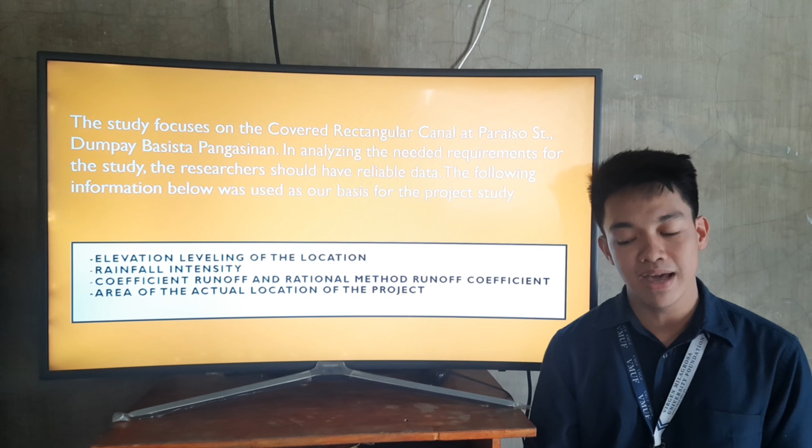The following information below was used as our basis for this project. The first one is the elevation leveling of the location. The second one is the rainfall intensity. The third one is the coefficient runoff and the rational method runoff coefficient. And the last is the area of the actual location of the project.

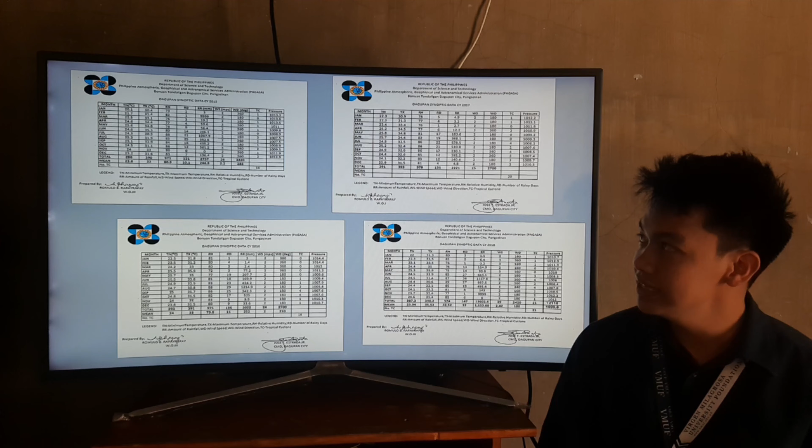So here's the data coming from Dagupan, PAGASA. As you can see, from 2015, 2016, 2017, 2018, and lastly 2019, this is the data that we collected and can use in our computation.

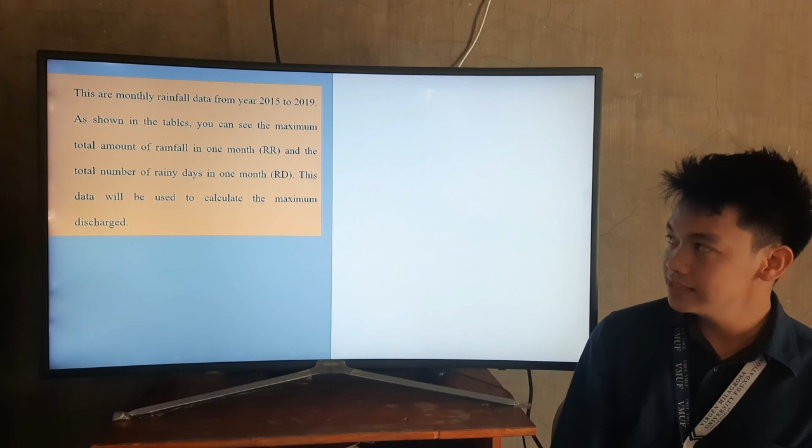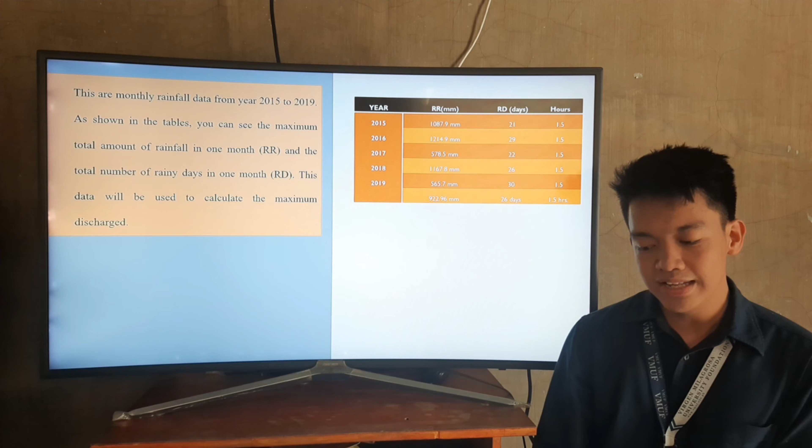These are monthly rainfall data from year 2015 to 2019. As shown in the tables, you can see the maximum total amount of rainfall in one month, RR, and the total number of rainy days in one month. This data will be used to calculate the maximum discharge.

So to get the rainfall intensity, we have the rainfall in one month over rainy days in one month times hours. So it is equal to 922.96 millimeter over 26 days times 1.5 hours, which is equal to 23.67. So let's say this is 30 millimeter per hour.

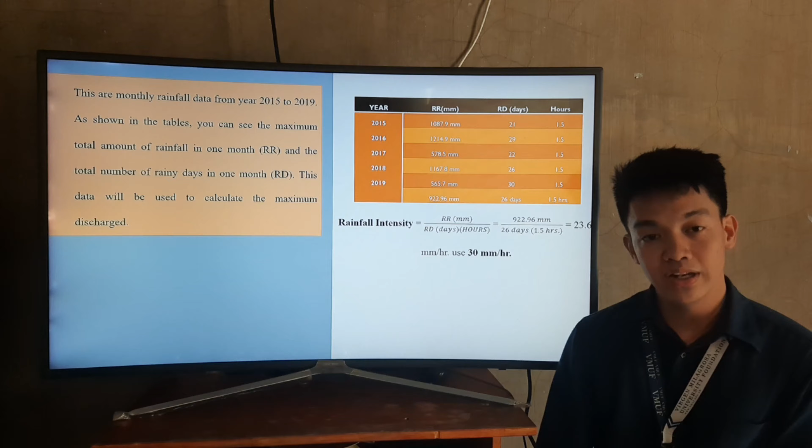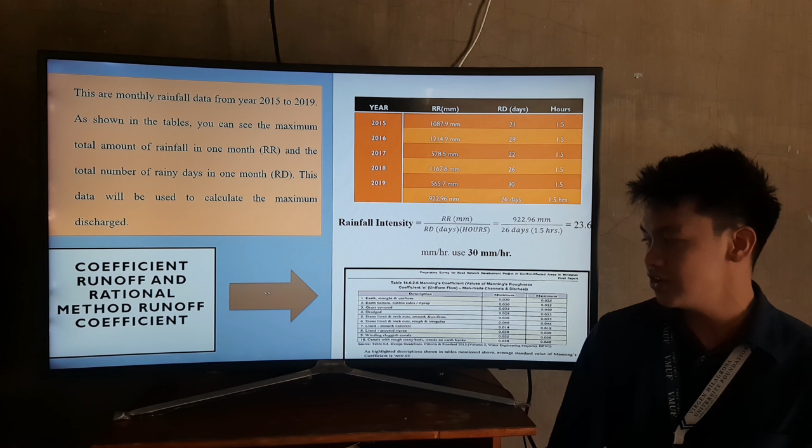So now we have the coefficient of runoff and the rational method runoff coefficient. There's data coming from Manning's coefficient, values of Manning's roughness coefficient n. So we use 0.018. And now let's go to the computation for the dimension of the canal.

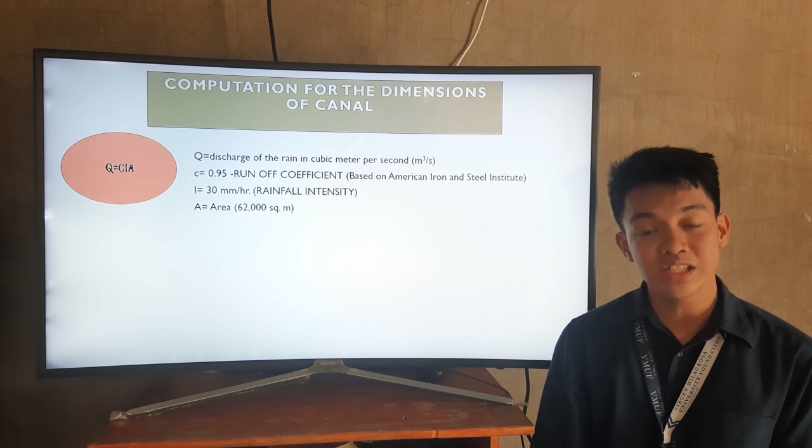So first we have the formula Q equals CIA. Q is the discharge of the rain in cubic meters per second. C is 0.95, the runoff coefficient, based on the American Iron and Steel Institute. I is the rainfall intensity, which is 30 millimeters per hour, and A is the area, which is 62,000 square meters. So we will get Q equals 0.95 times the quantity of 30 millimeters per hour times 1.

This is the conversion of our solution, times 62,000 square meter. So Q equals 0.49 cubic meter per second.

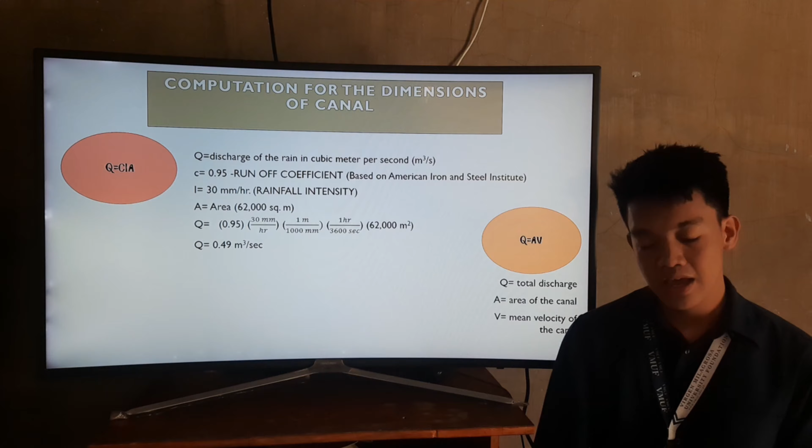Next is Q equals AV. So first, what is Q? Q equals total discharge, A is the area of the canal, V is the mean velocity of the canal.

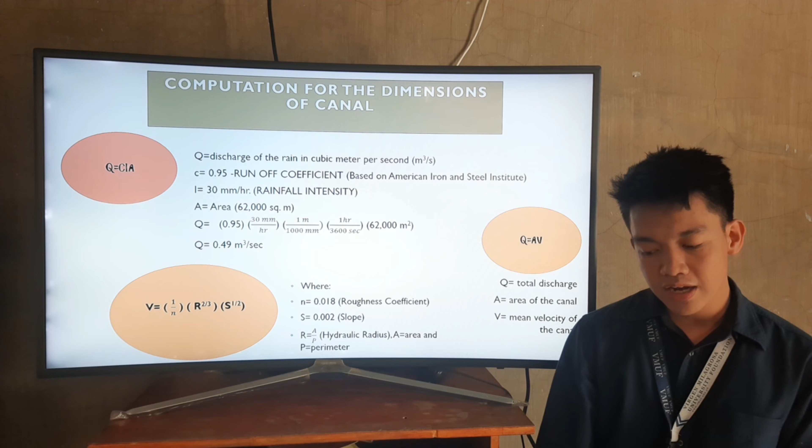And the last one is the Manning's formula, which is V equals 1 over N times R raised to 2/3 times S raised to 1/2. Where N equals 0.018, this is our roughness coefficient, S is 0.002, this is our slope, and R equals A over P, or this is hydraulic radius. So A is the area and P is the perimeter.

Now, to find the V in terms of D, using the most efficient cross-section, where B equals 2D. V equals Q over A, where A equals BD. V equals Q over BD, where B equals 2D. Therefore, we can get the first equation, V equals Q over 2D squared.

Next, using the Manning's formula, V equals 1 over 0.018 times the quantity of 2D squared over 4D raised to 2/3 times 0.002 raised to 1/2. So we can get D equals 0.49, or let's say this is 0.5.

So B equals 2D, so our B equals 1 meter.

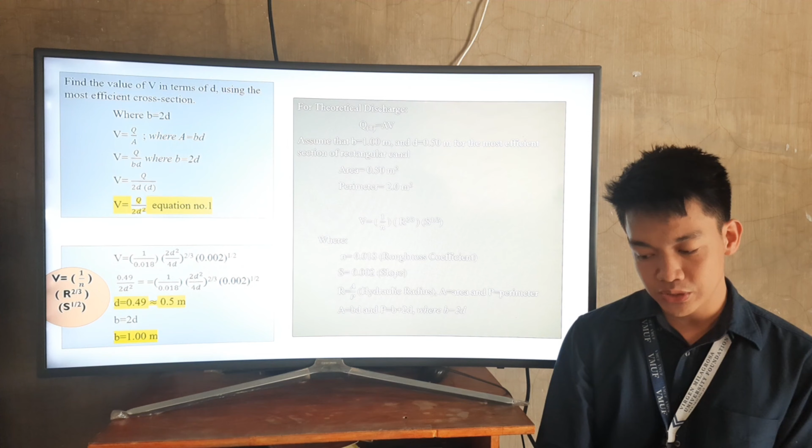Now, for theoretical discharge, QT equals AV. Assume that B equals 1 meter and D is 0.50 meter for the most efficient section of rectangular canal. Area is equal to 0.50 meter squared and perimeter is 2 meter.

So V equals 1 over N times R raised to 2/3 times S raised to 1/2, where N equals 0.018, S is 0.002, R equals A over P, and A equals BD. Next, V equals 1 over 0.018 times the quantity of A over P times 0.002 raised to 1/2.

So our Q is equal to 0.50, which is greater than our Q actual of 0.49. So it is safe and it is good for our design.

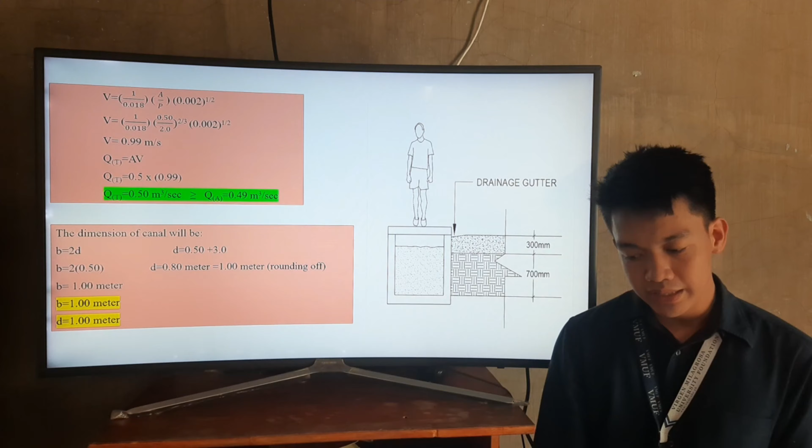Next, the dimension of canal will be B equals 2D, B equals 2 times 0.5, so let's say B equals 1 meter. So here, we have D equals 0.50 plus 3 as allowance, so D equals 0.80 meter, let's say this is 1 meter. So the dimension of our canal will be 1 meter by 1 meter.

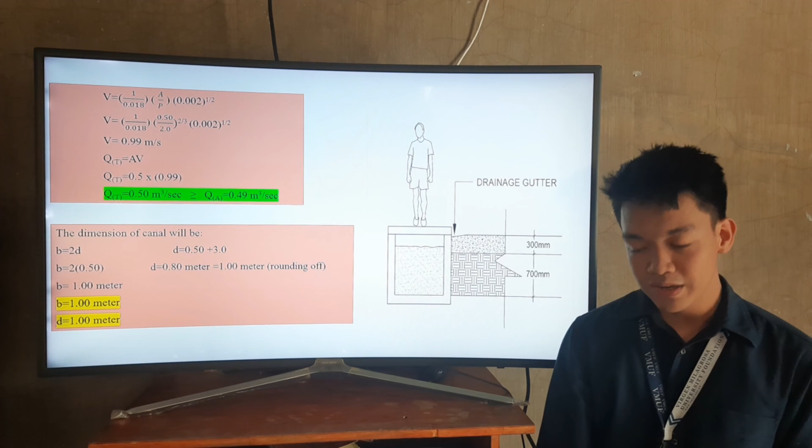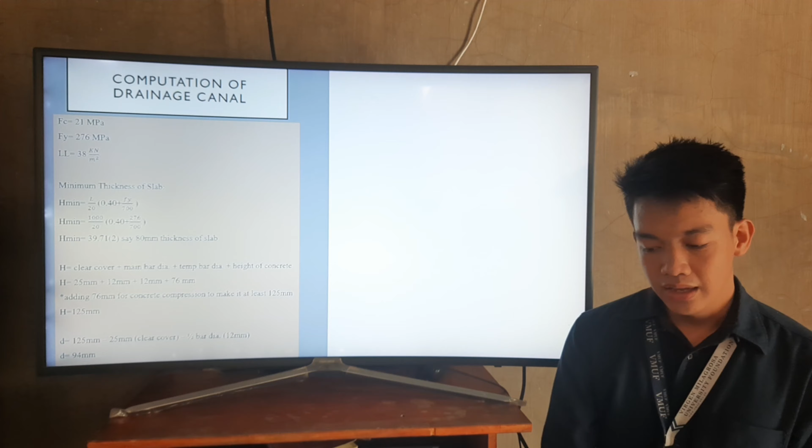Now we go to the computation of drainage canal in our slab, top slab. First, we have Fc 21 MPa, Fy equals 276 MPa. Our live load is equal to 38 kilonewton per meter squared.

So here, the minimum thickness of slab is H minimum equals L over 20 times the quantity of 0.40 plus Fy over 700. So H min is equal to 39.71, times 2, say 80 millimeter thickness of slab is our H minimum.

Next is H equals clear cover plus main bar diameter plus temperature bar diameter plus height of concrete. So H will be 25 millimeter plus 12 millimeter plus 12 millimeter plus 76 millimeter, adding 76 millimeter for concrete compression to make it at least 125. So our H equals 125 millimeter.

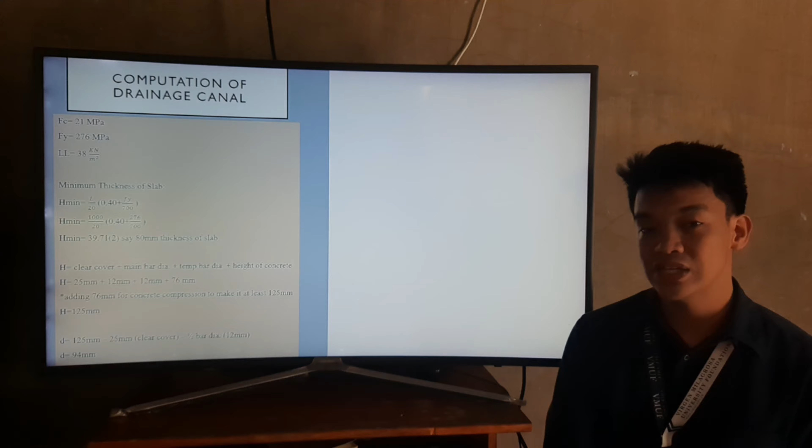So D is equal to 125 millimeter minus 25 millimeter, which is our clear cover, minus the 1/2 diameter of 12 millimeter. So our D is 94 millimeter.

So now, consider 1 meter strip of our slab. Weight of slab is equal to WS, or equal to gamma concrete times base times height. So our weight of slab is equal to 23.54 kilonewton per cubic meter times 1 meter times 0.125 meter. So our weight for the slab is 2.94 kilonewton per meter.

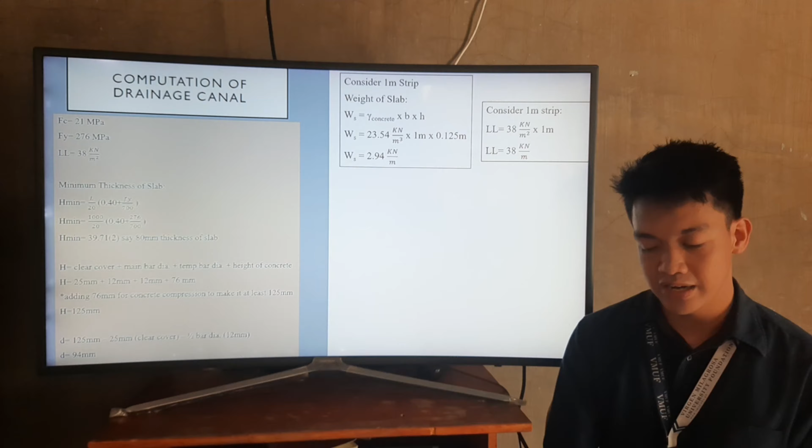Next is consider again the 1 meter strip of our slab. So live load is equal to 38 kilonewton over meter squared times 1 meter. Therefore, our live load is equal to 38 kilonewton per meter.

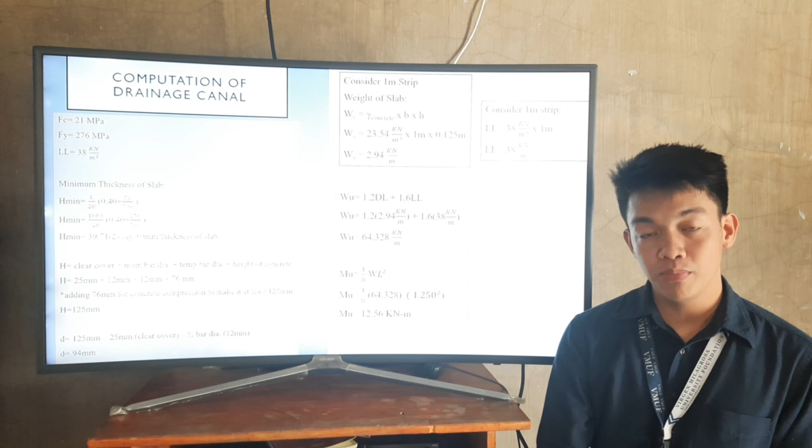Now we proceed to get the ultimate load. Ultimate load is equal to 1.2 dead load plus 1.6 live load. So W is equal to 1.2 times 2.94 kilonewton per meter plus 1.6 times 38 kilonewton per meter. So our W is equal to 64.328 kilonewton per meter.

Next is the moment ultimate, equal to 1 over 8 WL squared. So Mu is equal to 1 over 8 times 64.328 times 1.250 squared. So therefore, our Mu is equal to 12.56 kilonewton meter.

Next, Rn is equal to Mu over 0.90 times B times D squared. So our Rn is equal to 1.579397, 415. Next, P is equal to 0.85 f'c over fy times the quantity of 1 minus the square root of 1 minus 2Ru over 0.85 f'c. So we get P equals 0.006.

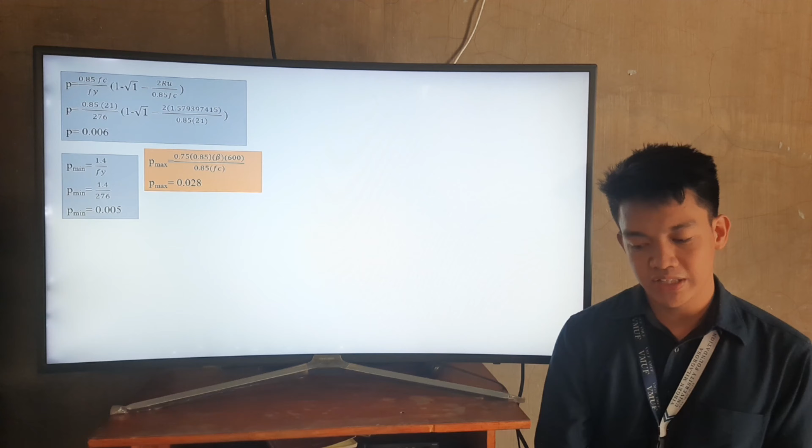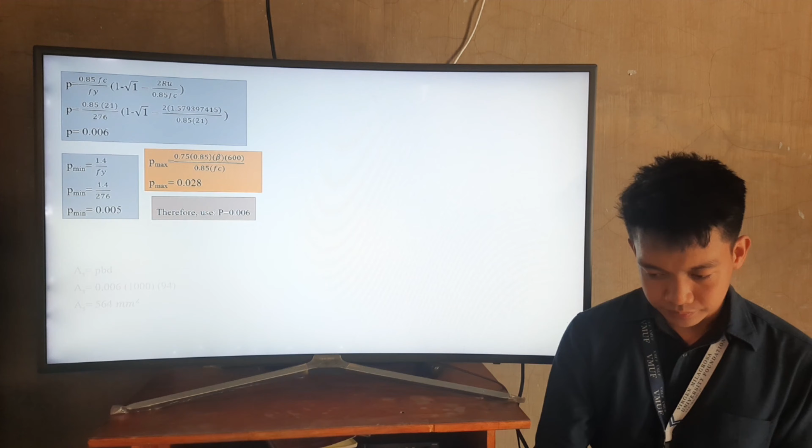Now to get the P minimum, it is equal to 1.4 over f of y. So P minimum is equal to 0.005. And lastly, the P max is equal to 0.75 times 0.85 times beta times 600 over 0.85 times f of c. So our P max is 0.028.

Therefore, use P equals 0.006. So area of our steel is equal to P times B times D. So AS is equal to 0.006 times 1000 times 94. Therefore, our area is 564 millimeters squared. Using 12 millimeter bar for our main bar, N equals 564 over pi over 4 times 12 squared, which is equal to 4.98, or let's say 5 bars. For our spacing, S is equal to pi over 4 times the quantity of 12 squared over 564.

So our spacing is 200 millimeter on center. Now we go to the design of the manhole cover. First, we have f of c equal to 21 MPa, f of y equal to 276 MPa. Our dead load is 24 kilonewton per meter squared, and our live load is equal to 35 kilonewton per meter.

Now, consider the 0.5 meter strip of our cover. So our dead load is equal to 12 kilonewton per meter. The next one is our live load. Live load is equal to 35 kilonewton per meter, and our ultimate load is equal to 1.2 DL plus 1.6 LL, or our live load. Therefore, our WU is equal to 70.40 kilonewton per meter.

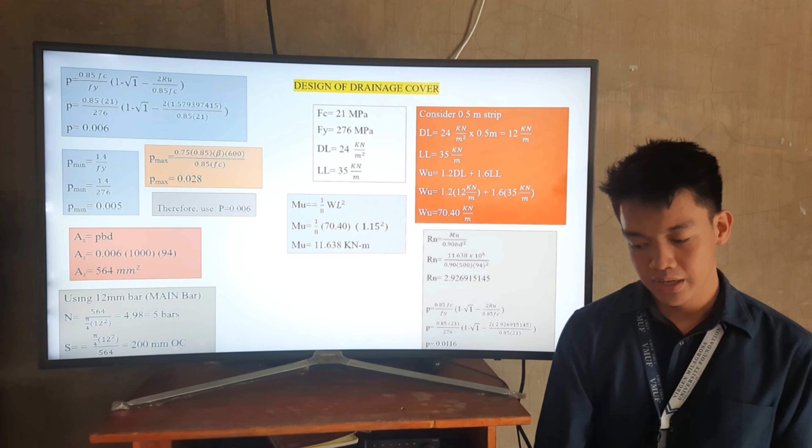Now we go to the MU, or we call it maximum or ultimate moment. So MU equals 1 over 8 WL squared. So MU is equal to 1 over 8 times 70.40 times the quantity of 1.15 squared. Therefore, our MU is equal to 11.638 kilonewton meter.

Now, we go to the Rn. To solve the Rn, the formula is MU over 0.90 B times D squared. Therefore, we will get Rn is equal to 2.926915145. So, to get the P, it is equal to 0.85 f of c over f of y times the quantity of 1 minus the square root of 1 minus 2Rn over 0.85 f of c. Therefore, we will get P is equal to 0.0116.

And our P minimum is 0.005, and our P max is 0.028. Therefore, we will use P equal to 0.0116. Next, for our area, A equals PBD. A equals 0.0116 times 500 times 94. Our area is 545.2 millimeters squared.

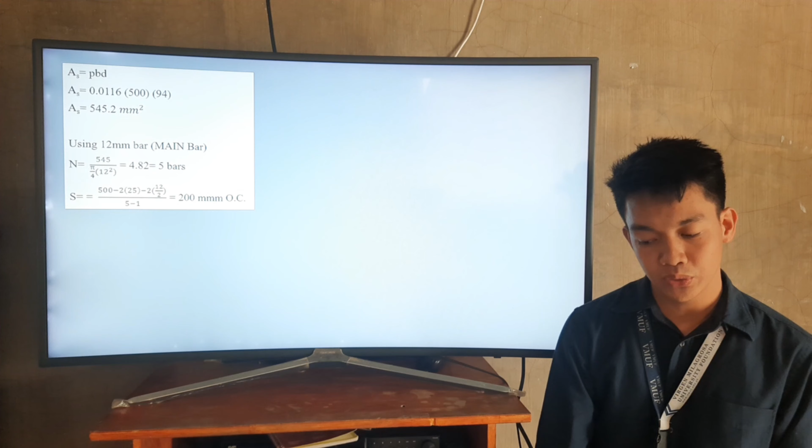Using 12 millimeter bar for our main bar, N is equal to 545 over pi over 4 times the quantity of 12 squared, which is equal to 4.82. Let's say this is 5 bars. Next, we will go to the spacing. So S is equal to 500 minus 2 times 25 minus 2 times the quantity of 12 over 2, over 5 minus 1. So S is 200 millimeter on center.

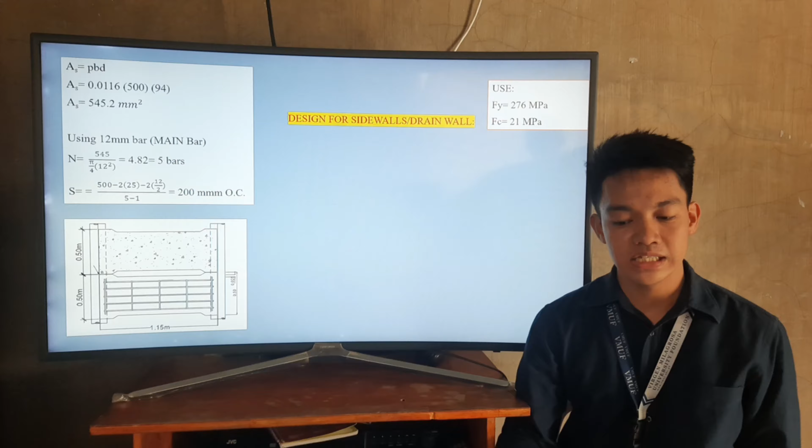So this is the actual design of our drainage cover, or for the manhole. Next, we proceed to the design for the side walls, or the drain wall. So use f of y equals 276 MPa. Our f of c is equal to 21 MPa. So this is the diagram for the clear explanation of our design.

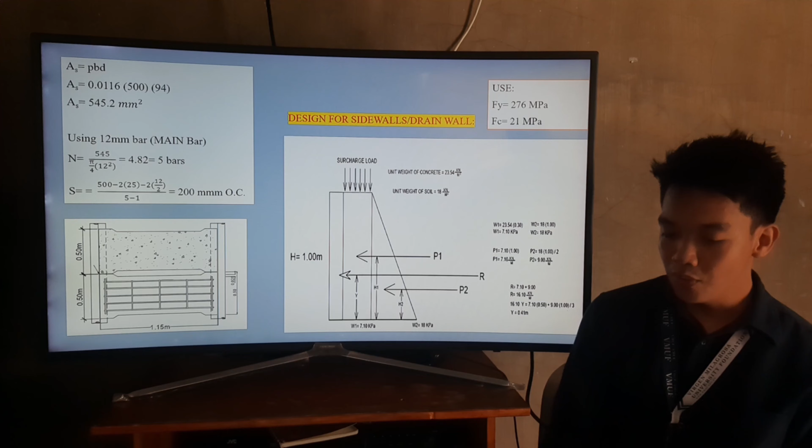So we have the surcharge load. The unit weight of concrete is 23.54 kilonewton per cubic meter, and our unit weight of soil is equal to 18 kilonewton per cubic meter. So our W1 here is 23.54 times 0.30. So our W1 is 7.10 kPa. The next one is W2. W2 is the 18 kilonewton per cubic meter times 1. So our W2 is 18 kPa.

Next one, to get the P1, P1 is 7.10 times 1. Therefore, P1 is 7.10 kilonewton per meter. The next one is to get the P2. P2 is 18 times 1 over 2. Therefore, our P2 is 9 kilonewton per meter.

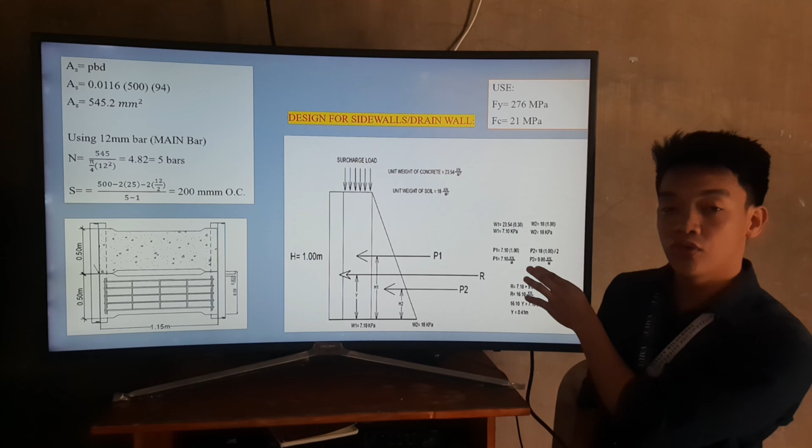Now, to get R, it is equal to 7.10 plus 9.00. R equals 16.10 kilonewton per meter. So, 16.10 times Y is equal to 7.10 times 0.50 plus 9 times the quantity of 1.00 over 3. So, our Y is equal to 0.41 meter.

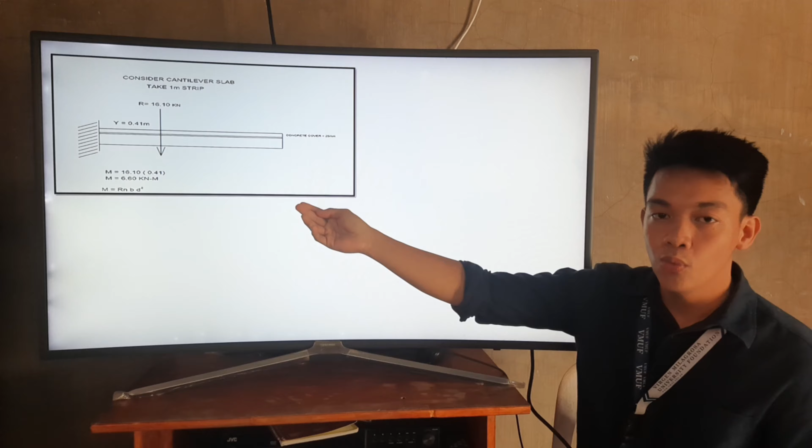So, next is consider the cantilever slab, take 1 meter strip. So our Y given, Y equals 0.41, R is 16.10 kilonewton. So our M is equal to 16.10 times 0.41. Therefore our M is equal to 6.60 kilonewton meter.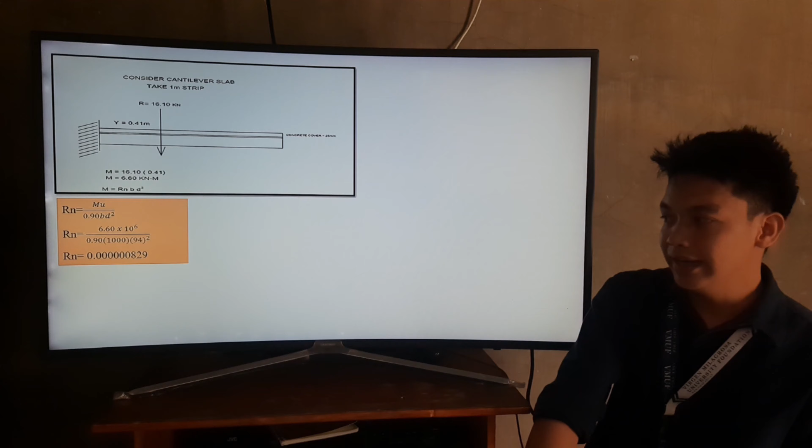So go back to our formula, M equals Rn B times D squared. So our Rn is equal to Mu over 0.90 times BD squared. So Rn equals 0.000000829. The next one is to get the P. P is equal to 0.85 f of c over f of y times the quantity of 1 minus the square root of 1 minus 2Rn over 0.85 f of c. Therefore, we get P is equal to 0.000000003.

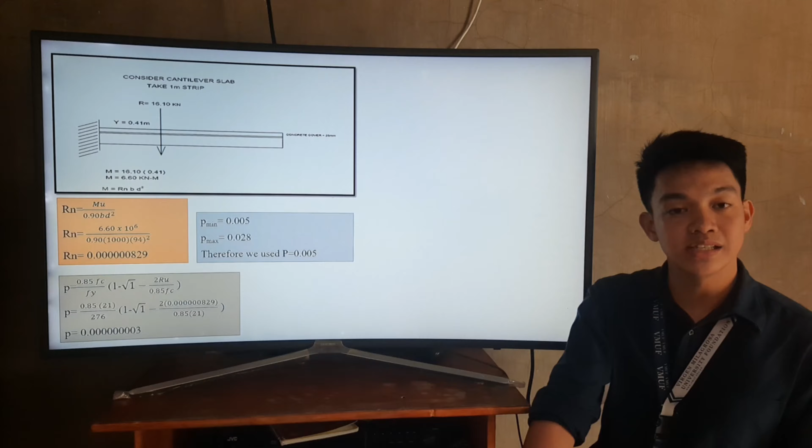Next, our P minimum is equal to 0.005 and our P max is equal to 0.028. Therefore, we will use P equals 0.005. So for the area, AS is equal to P times B times D. AS is equal to 0.005 times 1000 times 94, so our AS is equal to 470 millimeter squared.

Using 12 millimeter bar for our main bars, N is equal to 470 over pi over 4 times 12 squared, equal to 4.15, so let's say 5 bars. For spacing, S equals pi over 4 times 12 squared over 470, equal to 240 millimeter on center.

For checking our D, MU is equal to 0.90 times area AS times f of y times D times the quantity of 1 minus 0.59 f of y over f of c. So we get D is equal to 58.81 millimeter, less than 94 millimeter. It is safe and okay.

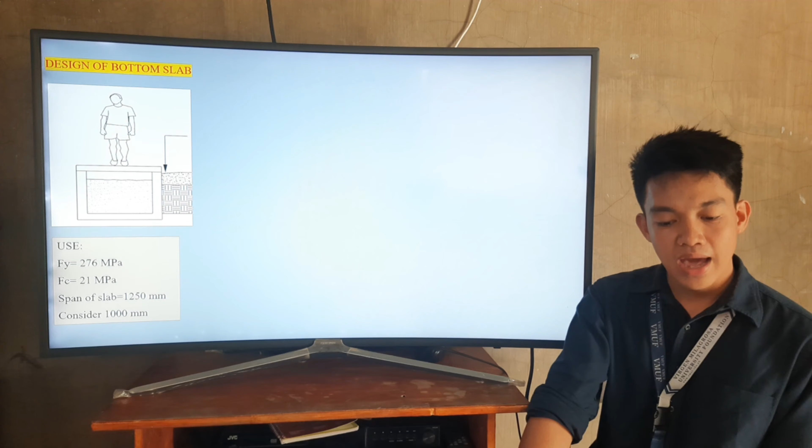Next, we will go to the design of the bottom slab. First, we will use again f of y equal to 276 MPa, f of c equal to 21 MPa, and the span of slab equal to 1250 millimeter, considering the 1000 millimeter strip.

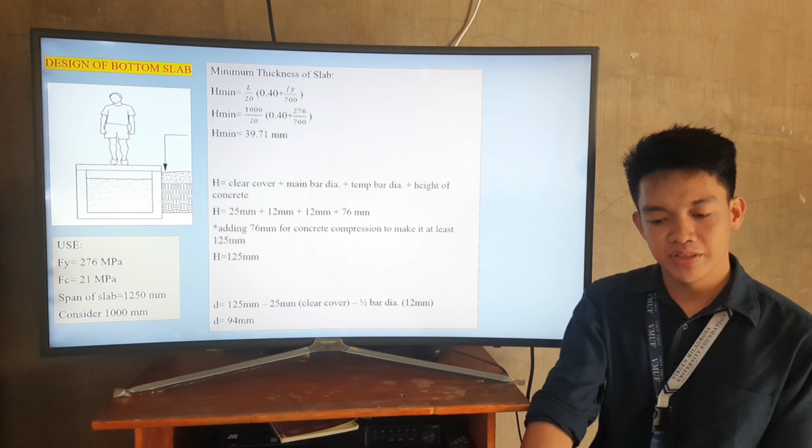So again, the minimum thickness of slab, H minimum, is equal to 39.71 millimeter. So our H is equal to clear cover plus main bar diameter plus temperature bar diameter plus height for concrete compression. H equals 25 millimeter plus 12 millimeter plus 12 millimeter, adding 76 millimeter for concrete compression to make it at least 125 millimeter. So our H is equal to 125 millimeter.

Therefore, our D is equal to 125 minus 25 millimeter for our clear cover, minus 1/2 bar diameter of 12 millimeter. Therefore, our D is equal to 94 millimeter.

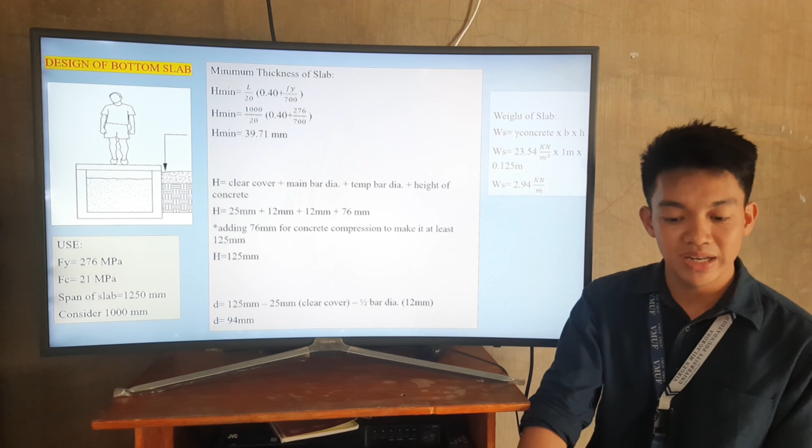Next, weight of slab. WS is equal to gamma concrete times base times height. WS is equal to 23.54 kilonewton per cubic meter times 1 meter times 0.125 meter. Therefore, our WS is equal to 2.94 kilonewton per meter.

Next, consider again the 1 meter strip. The live load will be 9.81 kilonewton per meter squared times 1 meter, equal to 9.81 kilonewton per meter.

Next is the WU, or the ultimate weight, equal to 1.2 dead load plus 1.6 live load. So our WU is equal to 1.2 times 2.94 kilonewton per meter plus 1.6 times 9.81 kilonewton per meter. So our W is equal to 19.244 kilonewton per meter.

Next, our MU is equal to 1/8 WL squared. MU is equal to 1/8 times 19.244 times the quantity of 1.250 squared. So our MU is equal to 3.75 kilonewton meter.

Next is to get the RN value. RN is equal to MU over 0.90 BD squared. So our RN is equal to 3.75 times 10 raised to 6 over 0.90 times 1000 times 94 squared. So our RN is equal to 0.4715558.

So our P is equal to 0.85 f of c over f of y times the quantity of 1 minus the square root of 1 minus 2RN over 0.85 f of c. Therefore, our P is equal to 0.00173.

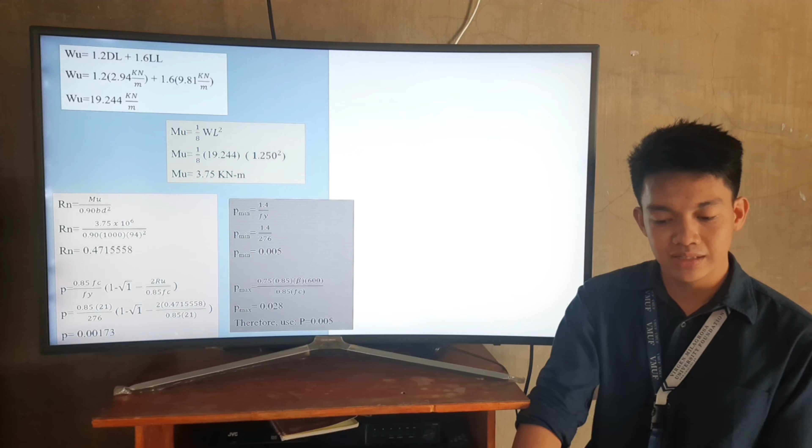Next, to get the P-min, our P-min is equal to 1.4 over f of y. P-min is 1.4 over 276, so we will get 0.005. And our P-max is equal to 0.75 times 0.85 times beta times 600 over 0.85 f of c. So our P-max is equal to 0.028. Therefore, we will use P equal to 0.005.

Next, for the area, AS equals P times B times D. AS is equal to 0.005 times 1000 times 94. So our AS is equal to 470 millimeter squared.

Using 12 millimeter bar for our main bars, N is equal to 470 over pi over 4 times 12 squared, equal to 4.15, so let's say 5 bars. For spacing, S is equal to pi over 4 times 12 squared over 470, so the spacing is 240 millimeter on center.

Checking for the D: MU is equal to 0.90 times AS times f of y times D times the quantity of 1 minus 0.59 f of y over f of c. So 3.75 times 10 raised to 6 is equal to 0.90 times 470 times 276 times D times the quantity of 1 minus 0.59 times the quantity of 0.005 times 276 over 21. So our D is equal to 28.97, which is less than 94 millimeter... wait, our D is safe.

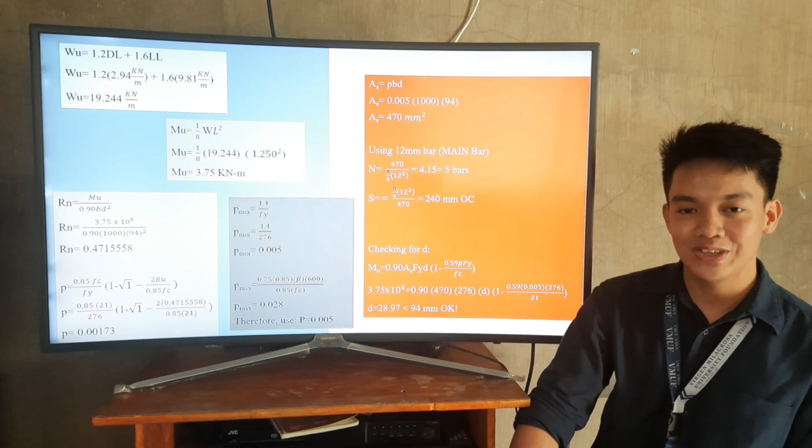So for our next topic is the material estimate.

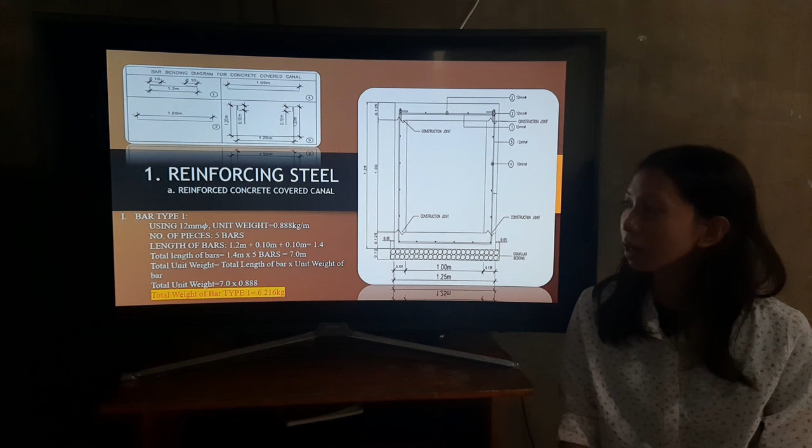For the reinforcing steel, bar type 1 using 12mm bar, unit weight 0.888 kg per meter. The total weight of bar type 1 is equal to 6.21 kg.

For bar type 2 using 12mm bar, unit weight 0.888 kg per meter. The total weight of bar type 2 is equal to 4.440 kg.

For bar type 4, using 10mm bar, unit weight 0.617 kg per meter. The total weight of bar type 4 is equal to 9.872 kg.

For bar type 5, using 12mm bar, unit weight 0.888 kg per meter, the total weight of bar type 5 is equal to 16.872 kg.

So for the total weight of reinforcing steel, we have 37.4 kg per linear meter of concrete covered canal. These are the schedule of reinforcement per 1 meter strip. H is equal to 1,000 meter concrete covered canal.

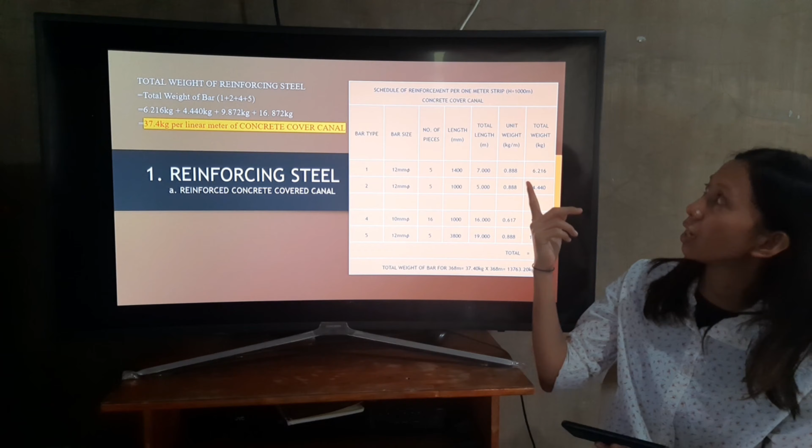For the total weight of bar for 368 meter is equal to 13,763.20 kg.

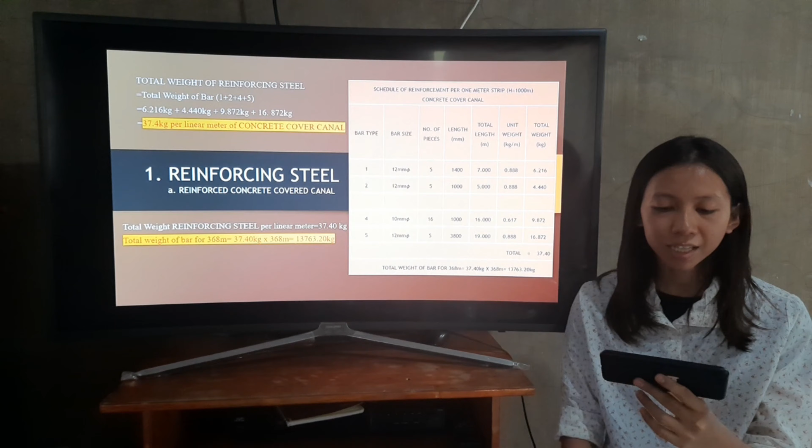Reinforcing steel for bar type 1 using 12mm bar, unit weight 0.888 kg per meter. The total weight of bar type 1 is equal to 11.3664 kg.

For bar type 2, using 12mm bar, unit weight 0.888 kg per meter, the total weight of bar type 2 is equal to 2.3088 kg.

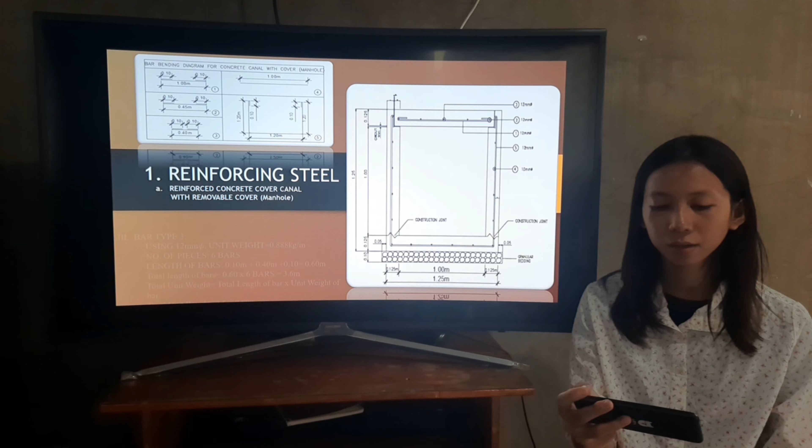For bar type 3, using 12mm bar, unit weight 0.888 kg per meter, the total weight of bar type 3 is equal to 3.1968 kg.

For bar type 4, using 10mm bar, unit weight 0.617 kg per meter, the total weight of bar type 4 is equal to 9.872 kg.

For bar type 5, using 12mm bar, unit weight 0.888 kg per meter, the total weight of bar type 5 is equal to 16.872 kg.

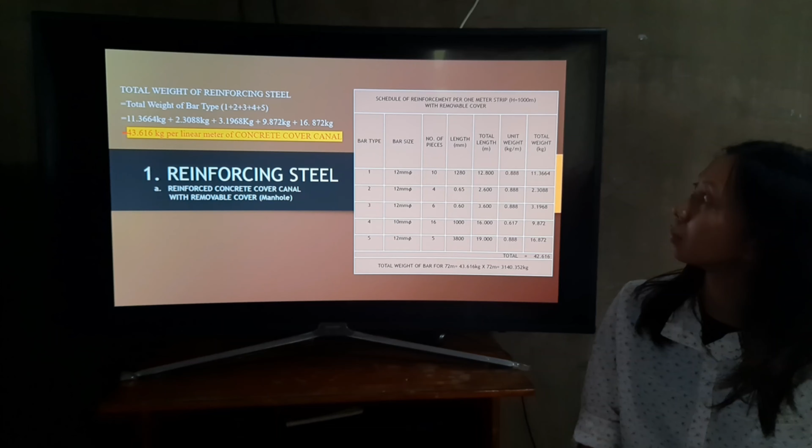So for the total weight of reinforcing steel, we have 43.616 kg per linear meter of concrete covered canal. These are the schedule of reinforcement per 1 meter strip. H is equal to 1,000 meter with removable cover.

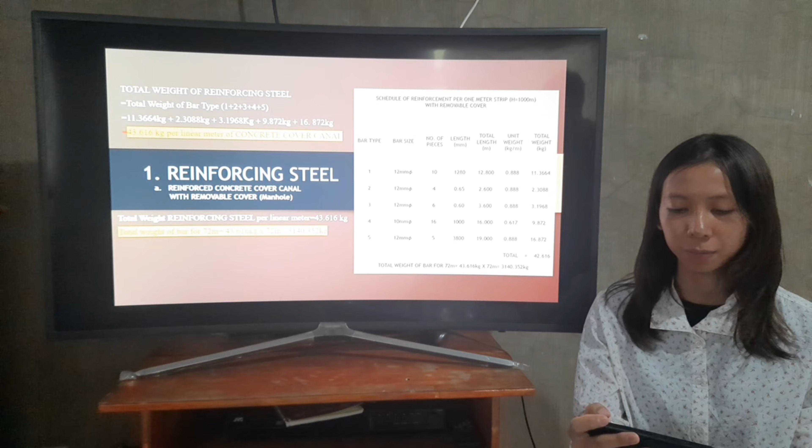So for the total weight of bar for 72 meter is equal to 3,140.352 kg. So for the summary for reinforced steel bar, for the 10mm bar, RSB is equal to 4,343.68 kg, say we have 4,344 kg.

For the 12mm bar, RSB, we have 12,558.872 kg, say we have 12,559 kg.

Next is the concrete works. So for the volume of the top slab, we have 0.15625 cubic meter. And for the volume of the bottom slab, we have 0.15625 cubic meters.

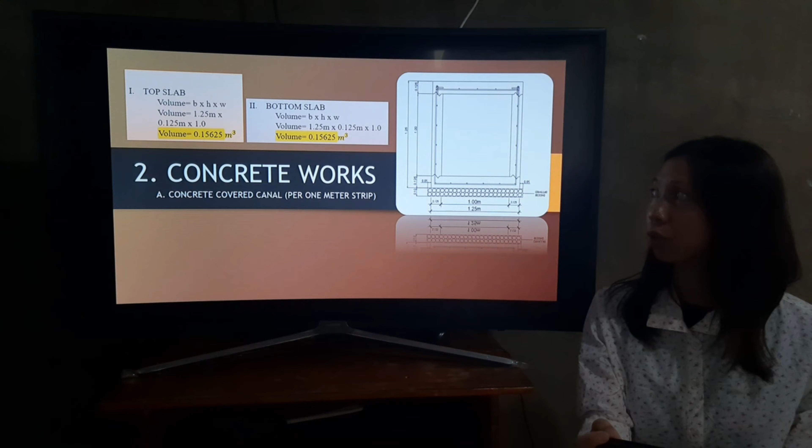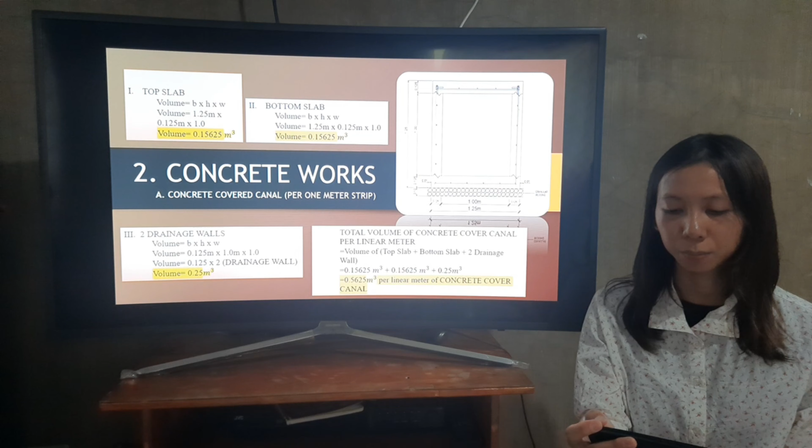Next is the two drainage walls. The total volume will be 0.25 cubic meter. So for the total volume of concrete covered canal per linear meter, we have 0.5625 cubic meter per linear meter of concrete covered canal.

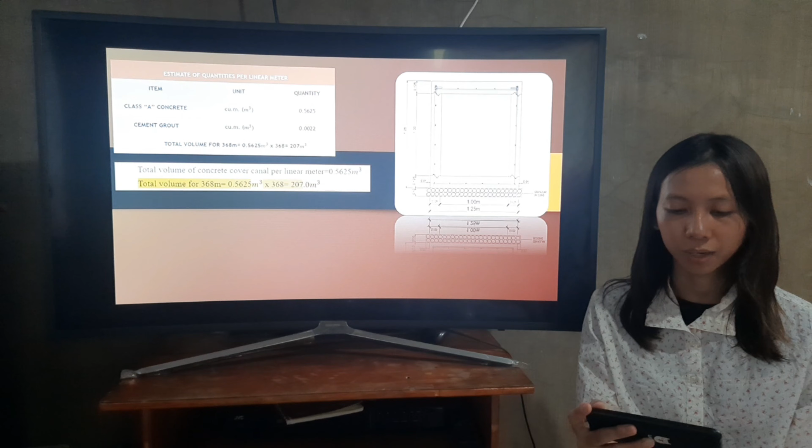So these are the estimate of quantities per linear meter. For class A, we have, for the quantity, 0.56. Total volume for 368 meters, we have 207 cubic meters.

These are the complete portion coming from Max B. Fajardo.

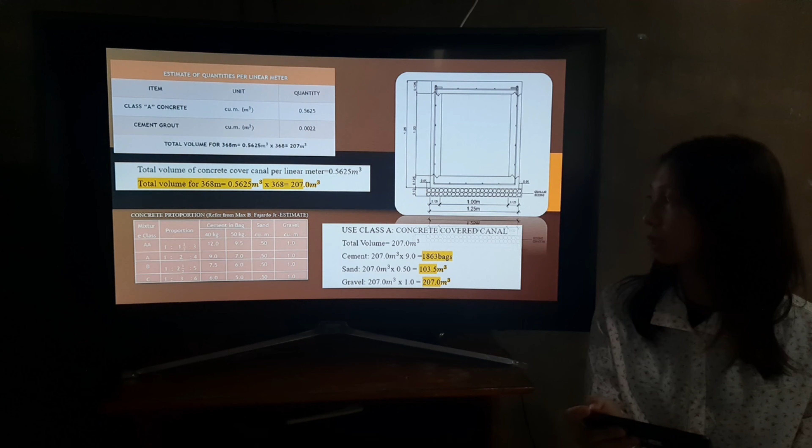Use class A, concrete covered canal. Total volume will be 207 cubic meter. For the cement, 1,863 bags. For the sand, we have 103.5 cubic meter. For the gravel, we have 207.0 cubic meter.

Concrete works. For the top slab, we have 0.10 cubic meter. For the bottom slab, we have 0.15625 cubic meter. For the two drainage walls, we have 0.25 cubic meter.

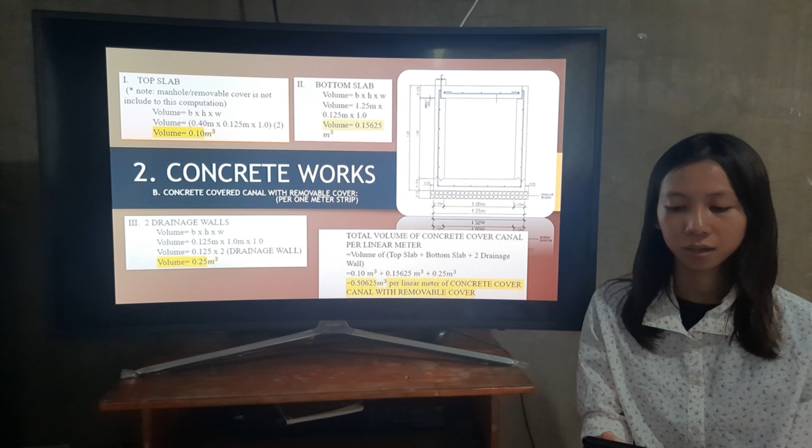And for the total volume of concrete covered canal per linear meter, we have 0.50625 cubic meter per linear meter of concrete covered canal with removable cover.

So these are the estimate of quantities per linear meter. For the total volume for 72 meter, we have 40.50 cubic meter.

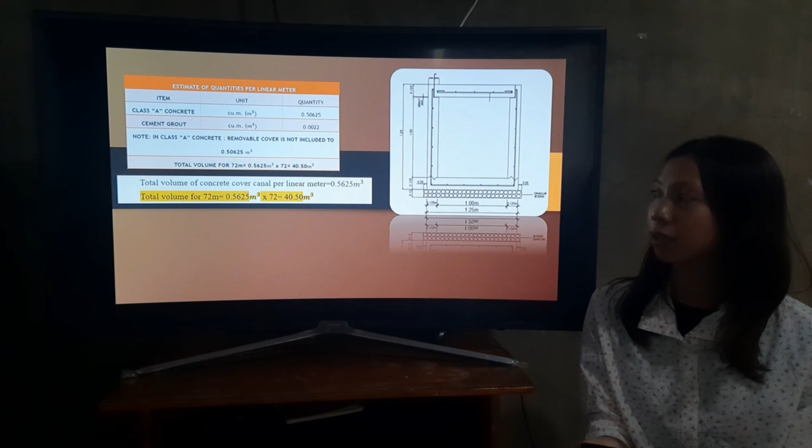Concrete proportion referred from Max B. Fajardo estimate. Use class A, concrete covered canal. Total volume 40 cubic meter.

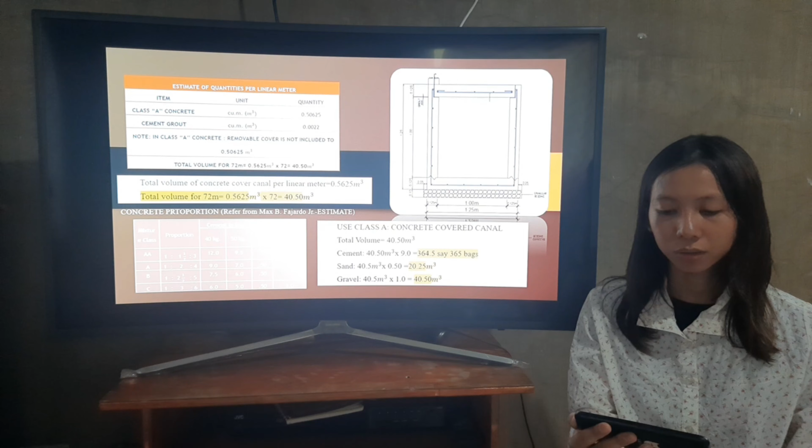For the cement, 364.5, say 365 bags. Sand, 40.5 cubic meter times 0.50 is equal to 20.25 cubic meter. For the gravel, we have 40.50 cubic meter.

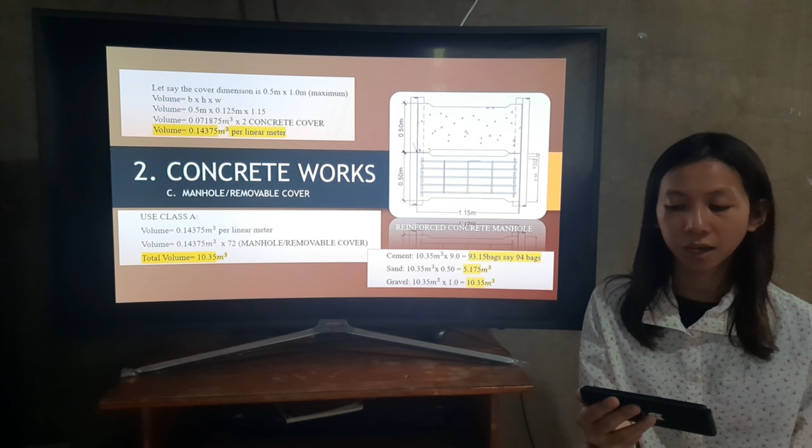For the cement, we have 93.15 bags, say 94 bags. Sand, we have 5.175 cubic meter. Gravel, we have 10.35 cubic meter, is equal to 10.35 cubic meter.

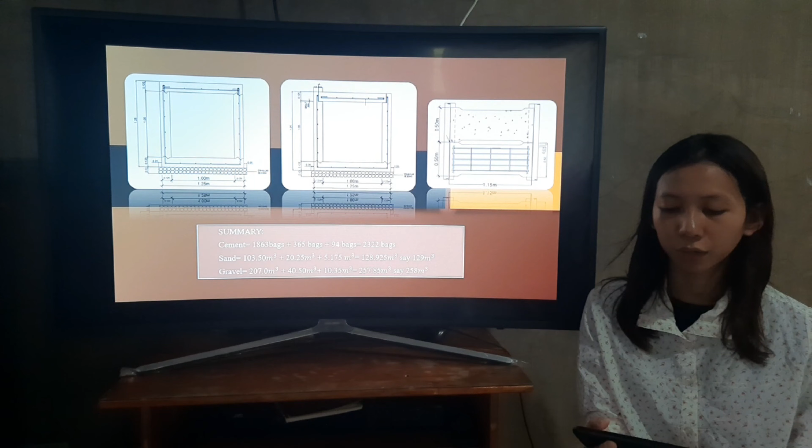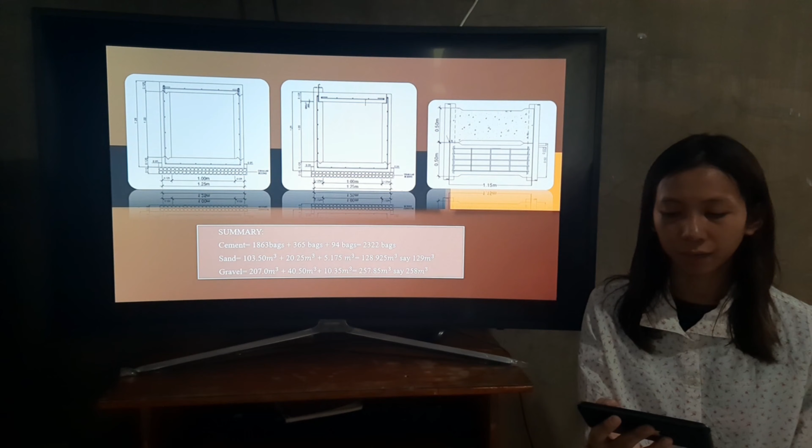So for the summary, for the cement, we have 2,322 bags. For the sand, we have 128.925 cubic meter, say 129 cubic meter. For the gravel, we have 257.85 cubic meter, say 258 cubic meter.

For granular bedding per linear meter, using 3/8 drainage aggregates, the total volume will be 59.40 cubic meter. For the formworks, using 1/2 by 4 by 8 marine plywood, for the top slab, the total area will be 550 square meter.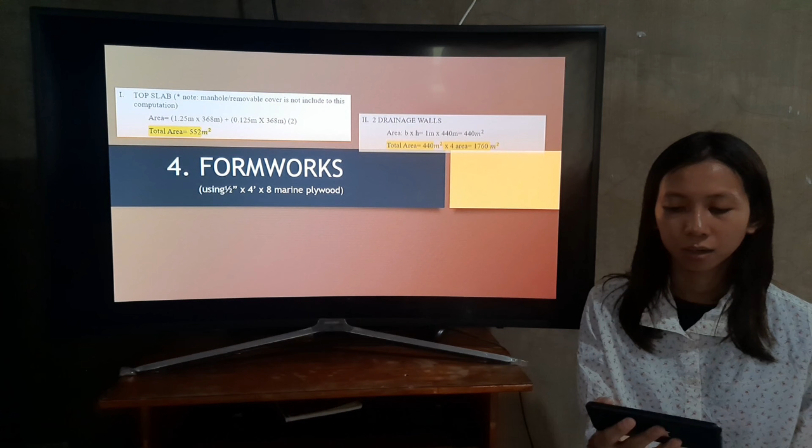For the 2 drainage walls, total area will be 1,760 square meters. Next, the manhole or removable cover. Total area will be 29.7 square meter.

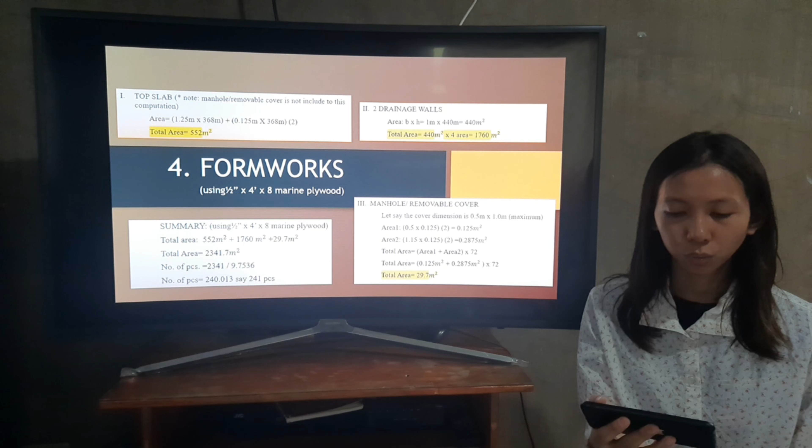So for the summary, using 1/2 by 4 by 8 marine plywood, the total area will be 2,341.7 square meters. For the number of pieces, we have 240.013, say 241 pieces.

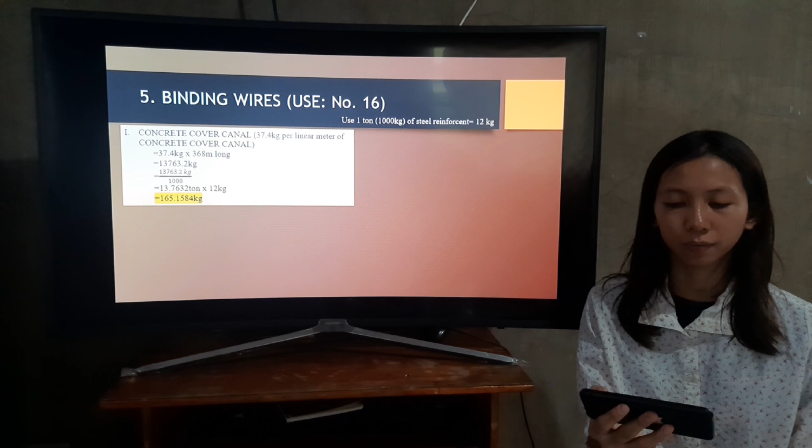For binding wires, next is the concrete cover canal, 37.4 kg per linear meter of concrete cover canal. We have 165.1584 kg. For the concrete cover canal with removable cover, we have 37.6842 kg.

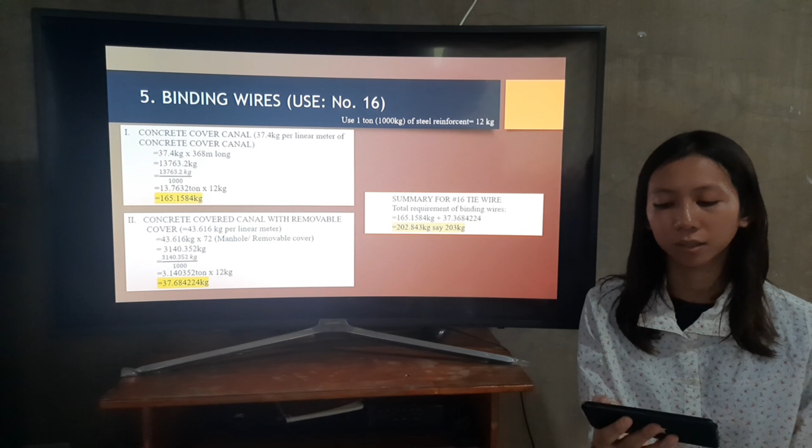For the summary for number 16 tie wire, total requirement of binding wires is equal to 202.843 kg, say 203 kg. Number 2 by 2 by 12.

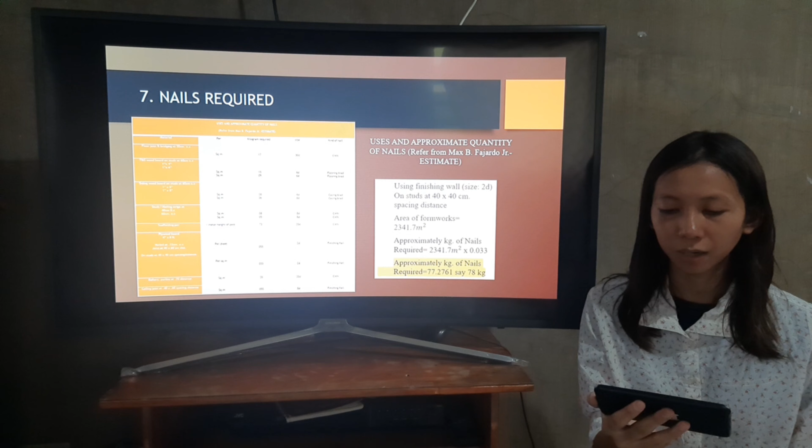Nails required: we have approximately 77.2761 kilograms, say 78 kilograms. This is part of the bill of materials and cost estimates.

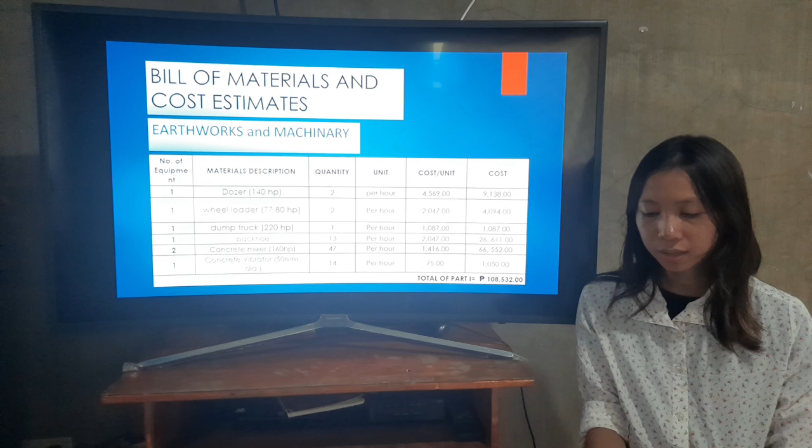For earthworks and machinery, we have a total cost of 108,532 pesos. For the concrete and masonry works, we have a total of 1,606,032 pesos. For the carpentry works, we have a total cost of 226,755 pesos.

Overall, the total will be 1,951,319 pesos. For the labor cost, we have a total of 971,200 pesos. So for the total project cost, we have 1,951,319 pesos for materials and 971,200 pesos for labor.

For on-cost materials at 12%, we have 234,158.28 pesos. For the cost for profit at 10%, we have 97,120 pesos. For the VAT at 5%, we have 16,563.91 pesos. For the total project cost, we have 3,270,363.19 pesos.

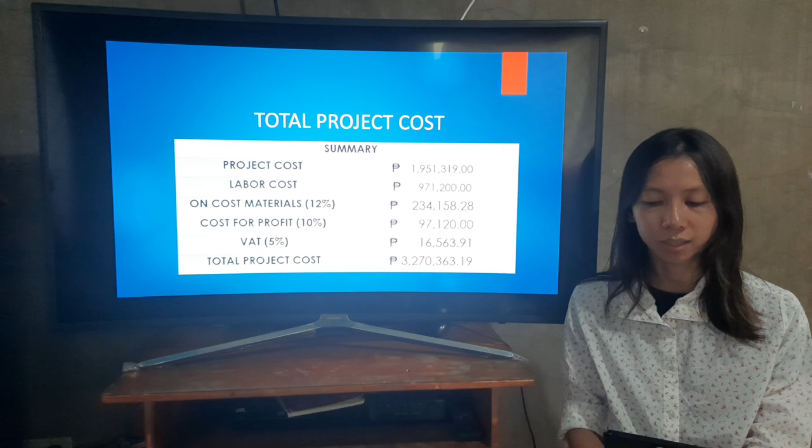My name is Michael Dumpay, and my part to report is the construction flow of works with manpower computation.

First is preparation of the location project. A1, clearing and grubbing, to complete is 1 day. A2, disposal of stripped materials, considering all materials to be disposed, to complete is 1 day. A3, hauling, to complete is 1 day.

Delivery of materials, days to complete is 4 days. A5, canal excavation, days to complete is 2 days, say 4 days in case of unforeseen scenarios. A6, clearing of used materials and site, days to complete is 1 day.

Second is building construction. B1, screening and granular base, days to complete is 2 days. B2, delivery of materials, days to complete is 4 days. B3, bottom slab concrete and flooring, days to complete mix is 2 days.

B4, fabrication and installation of rebars, days to complete is 30 days. B5, formworks for the sidewalls, number of days to complete is 4 days.

B6, flooring and concrete for drainage walls, days to complete mix is 2 days. B7, concrete vibrator, days to complete is 2 days. B8, dismantling of the formworks, days to complete is 2 days.

Third is construction of the top slab. C1, formworks of the top slab, days to complete is 2 days. C2, fabrication and installation of rebars, number of days to complete is 10 days.